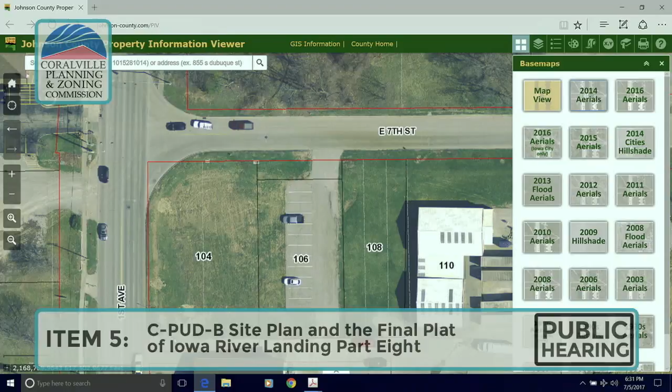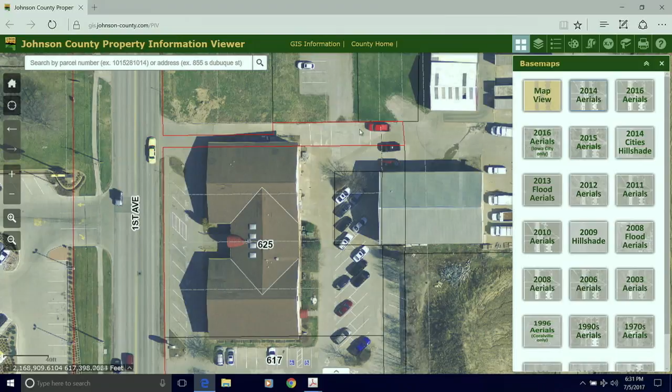I'll give you a little overview of what we've already approved. First, the location: it's on the corner of First Avenue and 7th Street. This is currently a vacant lot. Down here is where our Coralville City Recycling Center is, and the 625 building. So the development is going to take the area where the 625 building is, all of our recycling area, and this entire corner. This is the location of the development, to refresh your memory on that part.

This is the C-PUD-B site plan, but I wanted to show you the part we've already approved, which is the PUDA site plan for this development. The PUDA site plan encompasses the whole development, including this lot, lot number 1, where this building is going, Outlot A, which will be a green space, a city park, and all of the street improvement work that's part of the PUDA: improvement of 7th Street, improvement of the roundabout on 7th Street, an extension of 7th Street, and an extension of East 2nd Avenue to the south that eventually ties into 1st Avenue.

The PUDA process, as I said, we've already approved. So tonight we're looking at the PUDB, which is just the site that the actual building is going to sit on. It doesn't include the public improvements or any of the street improvements. The boundary of this PUD is right around the building. We're just approving the building tonight. And we've seen the building before.

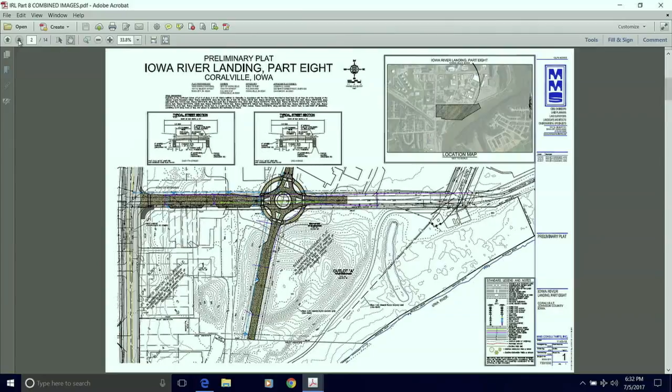Let me go back to this. We've seen this building before, and the images of it. It's a pretty massive building, and I gave you some of the specs in the notes: 309 dwelling units, 5 stories high, 2,822 square feet of commercial use, and a parking structure right in the center of the two wings of the building, which we can see a little later. That structure will have 469 parking places for cars, plus some street parking as well.

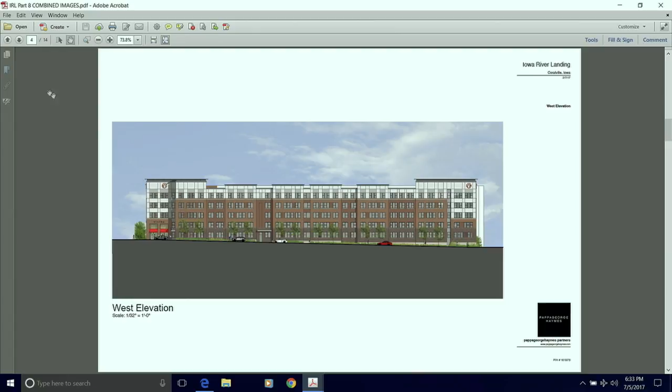These images show the west elevation along 1st Avenue, and the north elevation along 7th Street. This shows the elevation change on 7th Street from the 1st Avenue location down to 2nd Avenue, so there's quite a bit of elevation change.

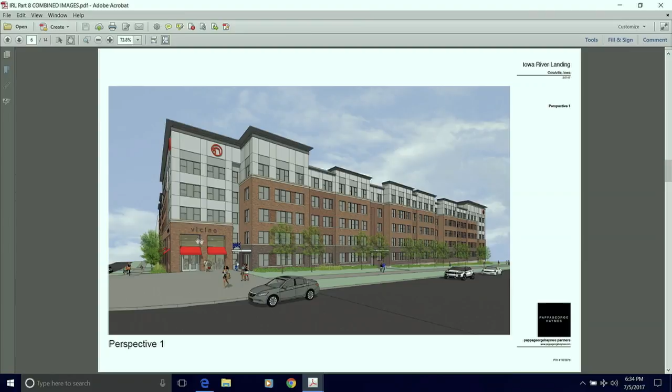This is another perspective, looking at the corner of the building, with 1st Avenue here and 7th Street running down here. This is what the main corner of the building will look like, and this is the location of the commercial area of the building. Here's another perspective looking at it from the north, down First Avenue.

Another 1st Avenue perspective. They really like their 1st Avenue design, I guess. This is actually down along 1st Avenue, and this is the south end of the building.

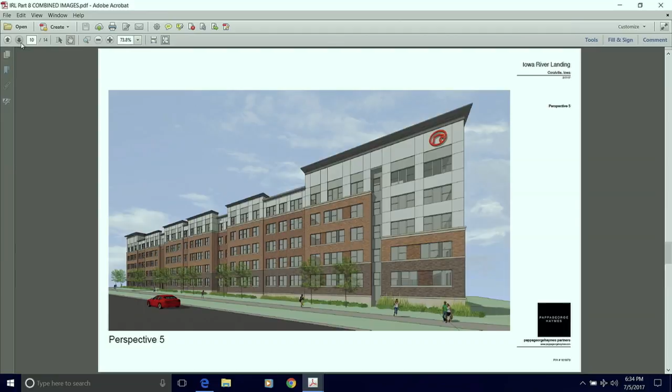This is a perspective of the rear of the building, and what you're looking at is just the west wing of the building. Over here in white is the east end of the building, the east wing, and then in the center is where that 469 space parking garage is.

Another perspective of the same. This is a perspective of it coming down 7th Street, coming down the hill. You can see the elevation change again.

So is all of the commercial space at ground level? Yes, it is.

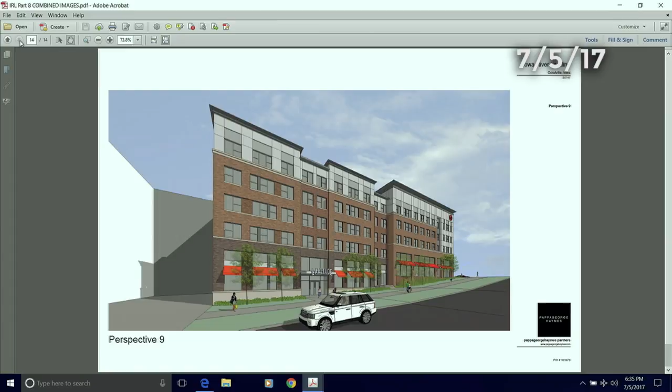Is there parking on 7th Street? There will be some street parking on 7th Street, yes. Where is it at, isn't that the 7th Street view? This is 1st Avenue right here. Okay. It's along 7th Street here, and then you turn the corner, and we have parking along East 2nd Avenue as well.

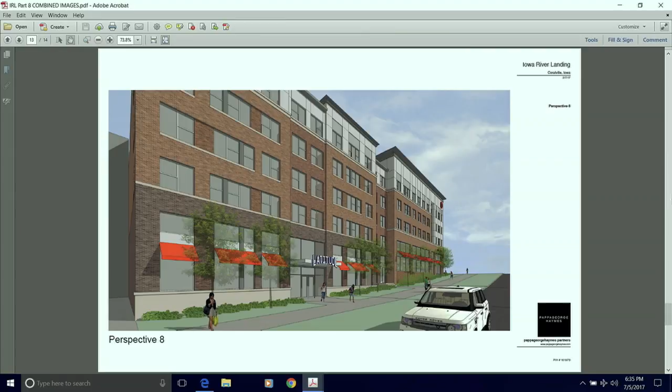I guess I got it backwards, 7th Street and 2nd Avenue, isn't it? I keep my streets and avenues backwards. This is East, you can see we've got some parking right along here along 7th Avenue, and we have parking along East 2nd Avenue right here. East 7th Street and East 2nd Avenue both have street parking. There's not a lot of them, but there's a few there. I don't know if I gave you that figure or not.

Are they all parallel spots, I'm assuming? Yes.

So in the one photo you showed, especially on the 7th Street side, down towards the bottom where the parking structure is, is the plan to have the parking structure mimic the building, kind of like we did on 5th Street, or is it to be more concrete looking? Because the only part of the parking structure you'll see is the south elevation of it, and you'll just see the open levels of the parking lot.

Okay, so it sits in the center, just so the only exposed elevation of it is the south elevation. Okay, that's what I thought from the original one, but in this one you could see chunks of white. Oh, that's just kind of a placeholder there to show you what the wings of the building look like.

So anyhow, this is what we're back to, the C-PUD-B site plan, which just encompasses the actual footprint of the building and the actual building itself. Any more discussion or questions?

Yeah, I still have a question on the parking on this thing. It says that it's supposed to have 661 parking spots for that size of units, and they only have 469? We're off by 200 some parking places.

It's kind of the way the IRL is building out. There's parking ramps, there'll be more parking ramps built. There'll be a parking ramp built with the Drury, there'll be a parking ramp built with the hospital wings. So it's all based on shared parking? It's all based on shared parking. Everything in the IRL is basically shared parking.

With the exception of the Drury ramp, the Drury ramp will have so many spaces in it that are strictly for the Drury. And the west parking ramp has spaces in it that are strictly for hospital use during the day, and then they're open to the public at night.

So we're supposed to consider 200 parking units in the Drury lot next to it are going to be going to this? No, where are you going to come up with those 200? There won't be any designated parking places. They'll just be down there, wherever they are. There won't be any designated parking places for this building.

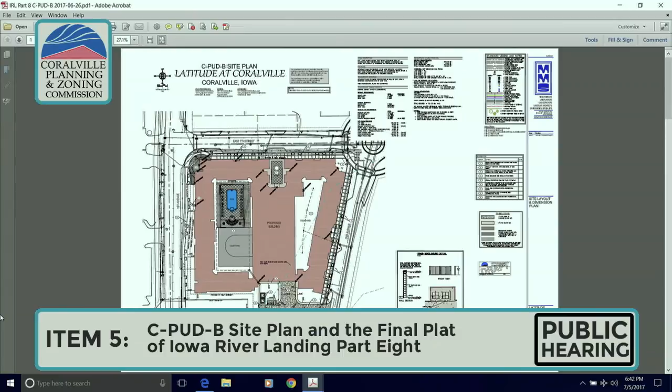Okay, we will now vote on the approval of the final plat. All in favor, say aye. Aye. Opposed? And motion carries.

Anything for next month yet, Jim? I have one submittal that we're looking at, but we just got it the other day, so I can't say for sure it'll be there. But so far, we're working on one submittal.

Okay, consider a motion to adjourn. So moved. All in favor, say aye. Aye. We are adjourned.